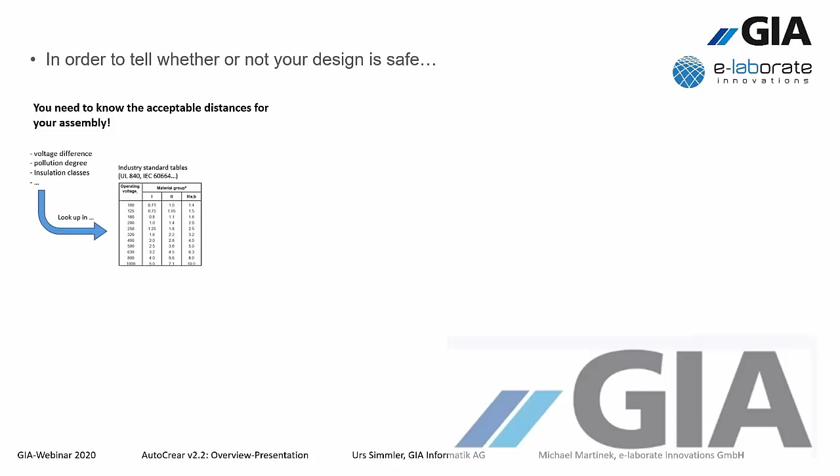These are all known parameters from you, and there are industry standards who publish tables. At some point they have found out that for a certain voltage difference of certain pollution degree, it's safe to have this distance. So somewhere in some table you can look it up, and then you know, for example, that you need like 12 millimeters here between these two networks.

This task can also be tough because there are a lot of industry standards out there for different scenarios, but it's not impossible. The thing which is almost impossible without a tool is the second thing you need.

You need to know the shortest paths in your design, and therefore you need to measure two different distances for each net pair. The clearance, which is the shortest path through the air, and the creepage, which is basically the shortest path on the surface of insulation. The clearance is quite clear, there's not much interpretation about this, but the creepage still has the additional aspect of this groove width parameter x.

This is defined by the industry standards to jump over certain grooves, for example. So the distance x depends on the pollution degree, and if you have a groove which is smaller than x, then the creepage can jump right over it. If it's bigger, then the creepage can at least jump over the corner. So this is a parameter which is very, very complex, especially in 3D.

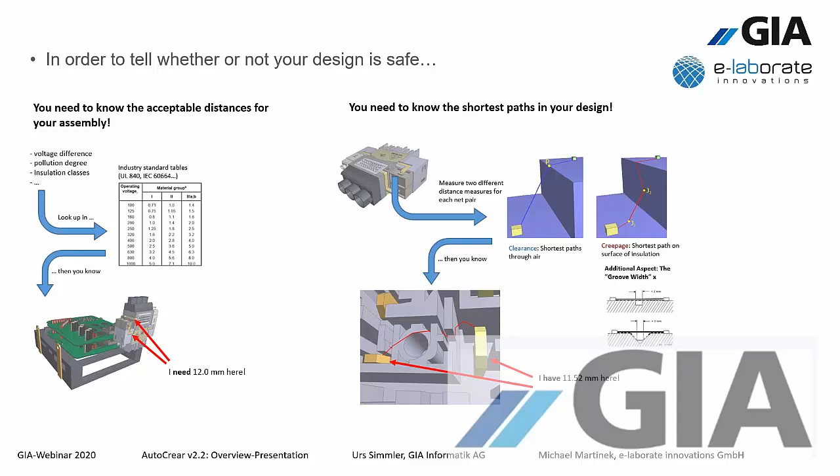As you can see in this result here, you would never even get close to the global minimum path, considering all of the aspects of a creepage path in this case. So your path determined manually will only be rough approximations. You don't have a basis for a decision whether your design is safe. Even if you know how much you need to fulfill, you never know if you really fulfill it in your design. So this is where AutoCrear comes into play.

For the first thing, you have to know the minimum acceptable distances. There's really not much we can do about this. You have to know your parameters, your pollution degree, in which you want to sell or use the assembly. You need to know the standards you have to fulfill. However, there is some help we can assist you with in the program.

In the program you can enter or import these requirements so that the program can also make this decision whether the determined paths are correct or not.

Maybe in the future we can also offer the industry standard tables in the program. This is not possible because this is top secret information from the certification authorities. They want to sell these tables to you, so it's not allowed to publish them in any way. So we are also not allowed to publish them in the software. Maybe in the future when we have more cooperations with the industry standards, which we already have ongoing.

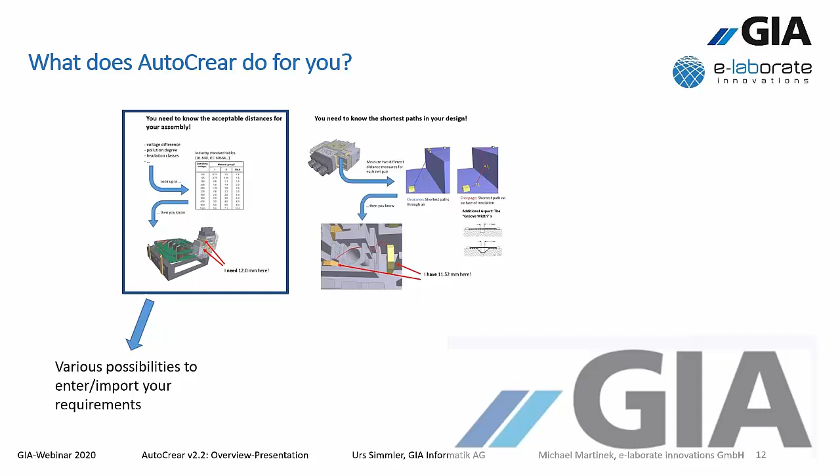But the core feature of the software in its current state is the exact determination of the clearance and creepage paths, the solution of the geometric problems of where exactly the critical paths are, and this is the information you definitely need in your product design. The software does more than that.

This computation engine is of course the core feature, but we have built a complete software solution which includes all the steps you need to perform in order to make this analysis, starting from the raw data you have in your CAD system or in your ECAD system, your PCBs. You don't need to do any preparation of this data outside of the program. Any step you need to eventually get to a documented analysis result can be performed within the software, including the import of the data and combining data from the two different worlds, mechanical and electronical, with minimum effort.

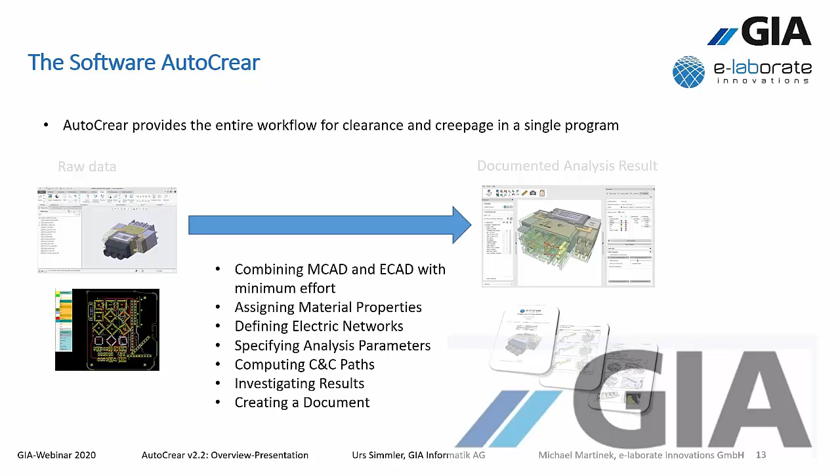Every step which is possible to make automatic is done automatic in the software. So with minimum effort you can get a documented result regarding clearance and creepage. We also implemented this in a very nice workflow which is very intuitive and easy to handle and easy to understand. This workflow I would like to present to you now live in the software.

So I already imported mechanical data. This is possible here with import assembly. Let me redo this step actually. We can import any kind of native data from one of the common systems, like SolidWorks, NX, Creo, CATIA, or you can also import step data, a common format for exchange. But it's always the safest way to make a native import.

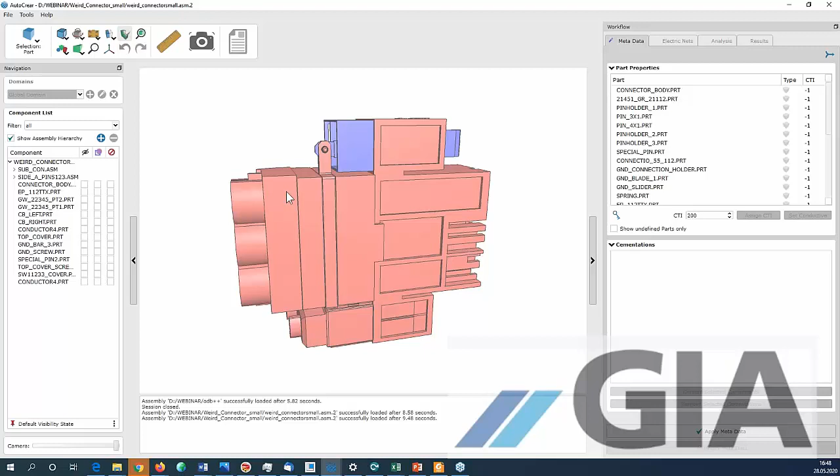In this case, I have a Creo model of our demo assembly. Maybe you have already seen this assembly in one of our demonstration videos. It's our standard model we use for demonstration. It doesn't have any useful application. It's just a very simple connector, kind of a connector we modeled just for demonstration.

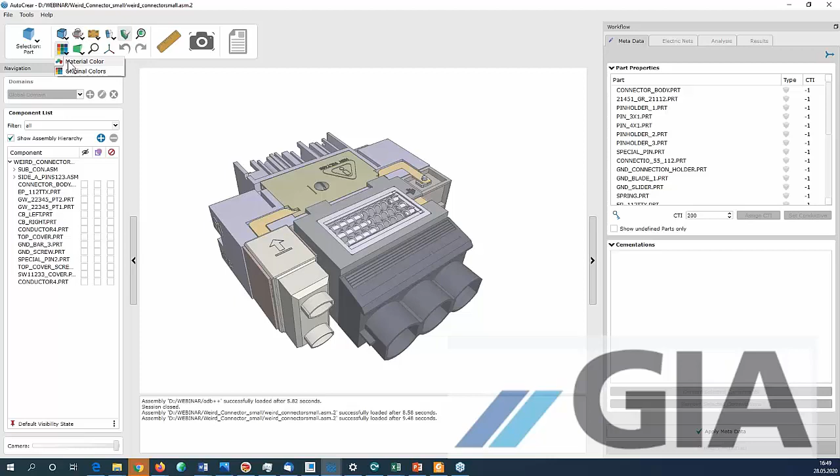And along with the geometry, we can also import the original colors, as you can see here. But it's very convenient, especially for the first steps in the algorithm, to see the material parameters, because this is the first step we need to perform in the workflow. Let me make a little more space for the 3D viewer. So the entire workflow happens here in this area. You will be guided through the entire process step by step.

And the first step is the assigning of meta information, especially material information, which tells whether a part is insulating or conductive. This is done by the CTI value, the comparative tracking index. A value of 0 indicates conductive material, while a value bigger than 0 means insulation — the bigger the value, the better the insulation. There are a total of 4 different insulation classes, and AutoCrear needs to know this value for further steps, and you can do this very efficiently in the program.

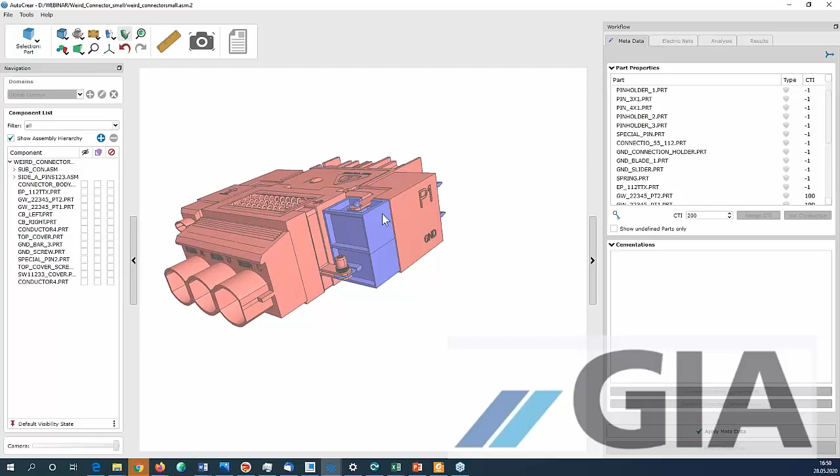Well, if you have such a value somewhere in your data, it's no problem — we can also import them automatically. As you can see here, this is a different color because it already has a material defined in the data, and we automatically imported this. But this is rarely the case that anyone has CTI values already specified in the data.

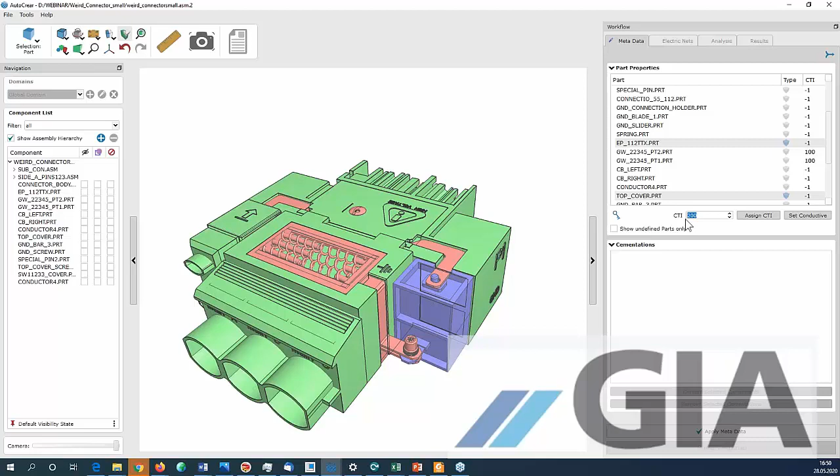But in the program we can do this very, very quickly. I can easily select components here and tell the program to assign the selection a CTI of, let's say, 200. The changed color indicates the material — blue means insulation — and if I tell the program that these 2 elements are conductive, setting them conductive, they become silver.

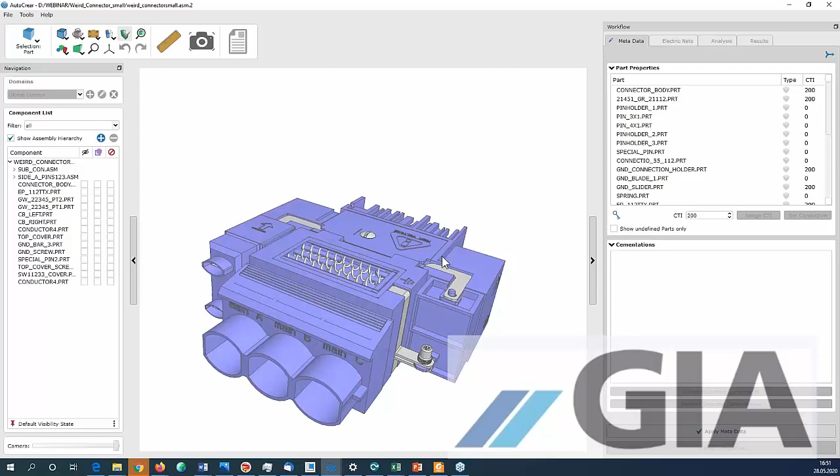It's also very convenient to activate this checkbox here. It automatically hides everything which is already assigned. So these elements are also insulating. This is insulating. Now all the rest is conductive. I can select this immediately at once by drawing a rectangle, set it conductive, and I'm already done with the material assignment, at least on a part level.

There are also certain elements like this, for example — let's concentrate on these 2 by just showing them. This might be a customer part which is not fully modeled, it's just the hull of it, only the interface, and this is one solid body, but it's not one homogeneous material, of course. These pins and this part in the back here need to be conductive actually.

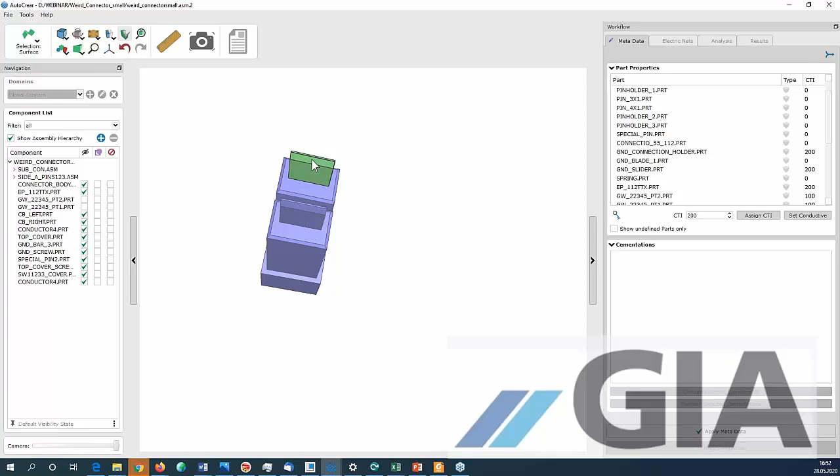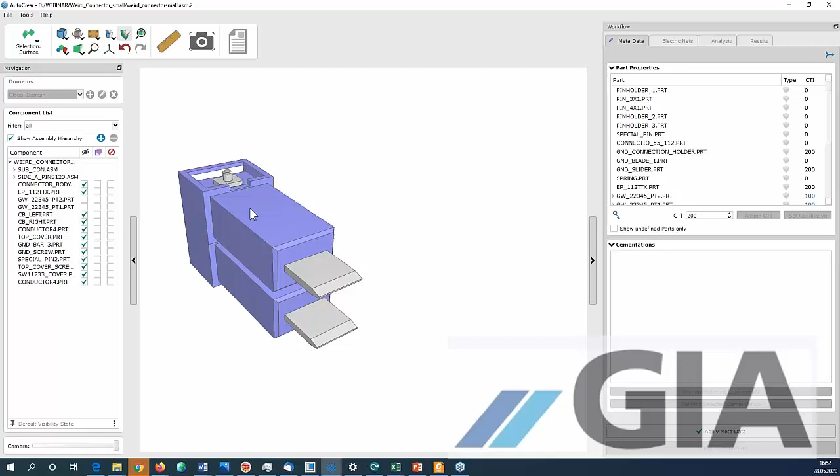It's no problem. We can switch to surface selection, select surfaces. We can also expand a surface selection to a convex region, which in most cases is exactly the effect you want to achieve. So I only have to select one representative surface of each of these extrusions. Then I expand the convex region, and I've now selected everything of them, can set them to conductive, and I'm already done with the specification of these inhomogeneous parts which often occur in mechanical data.

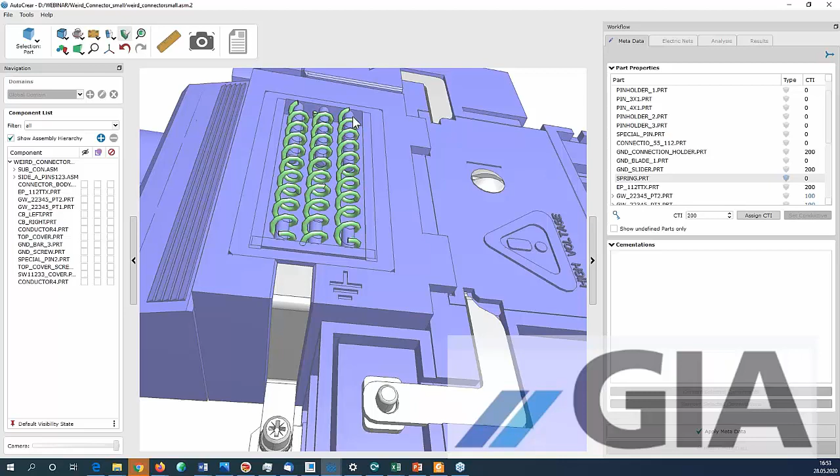So now we are actually finished with the material assignment. We can do more here in this first step. We can also tell the program a surface type, which is very helpful to eliminate certain geometric degrees of freedom. For example, this spring here is modeled in a certain position, but it can be arbitrarily rotated around its axis in the real data. So performing the analysis only on this position can be dangerous because you might miss the worst case.

What would be better is to replace this spring with our geometric representation, representing all possible positions. And this we can do automatically. You just have to tell the program that this is a spring by setting the corresponding type, spring. And the same you can do for screws, which also have some rotational degrees of freedom, by setting this to screw.

This has yet no effect, but in the next step there will be a processing of these assemblies.

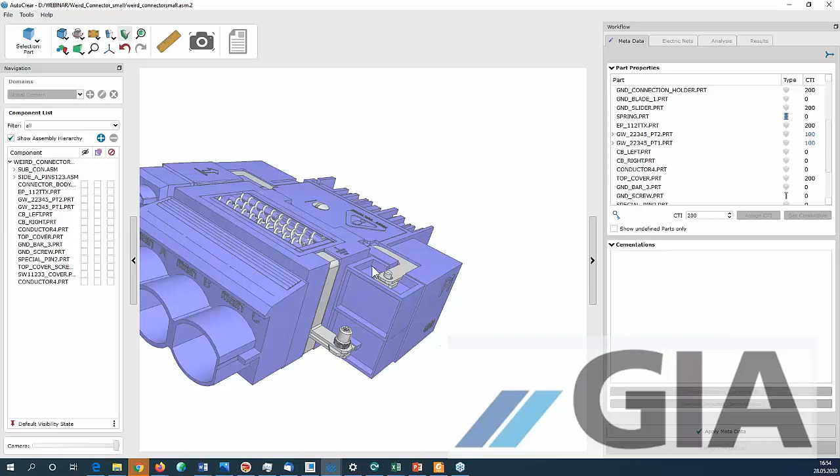But what if we also want to add further geometry to this scene? For example, I also want to add a PCB. No problem, as long as we are in the first step we can add more assemblies, or we can import PCBs directly by adding a PCB.

As you can see, this is still in the beta phase, not for long. This summer we plan to release it, but it already has great functionality and is ready for you to test and give us feedback on what else you need for this PCB import.

The format we need for this PCB import is ODB++. This is a common exchange format for ECAD data. It's basically the same as STEP for the MCAD world. So every common ECAD system is able to export ODB++.

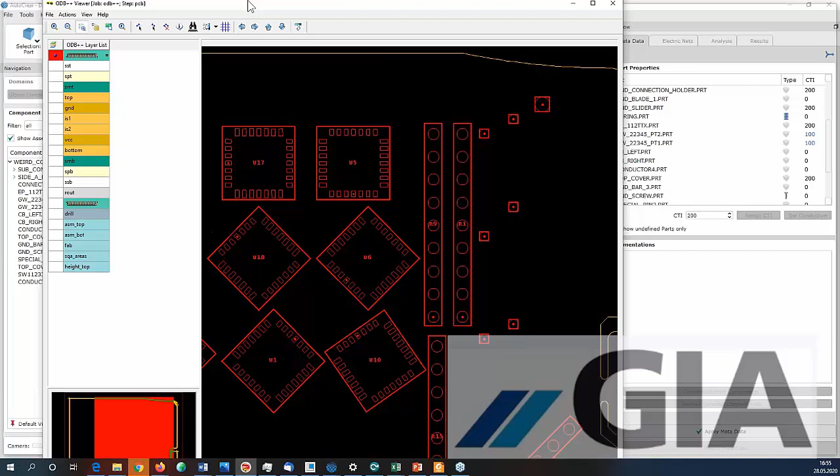And this data kind of looks like this. This is not AutoCrear, this is a simple ODB++ viewer. If you're familiar with ECAD data, this might ring a bell. The ECAD data is organized layer by layer. It's two-dimensional data. Here, for example, this is the top layer of the signal, the second layer, and so on.

And this information we automatically can transform to a 3D model.

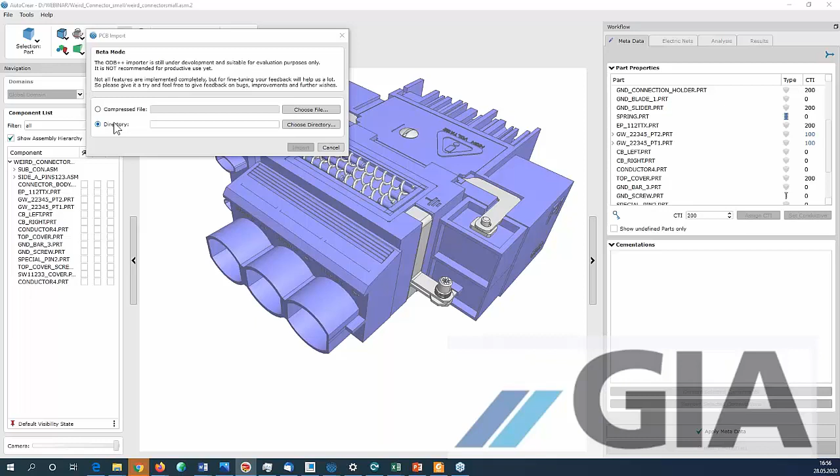ODB++ files are either stored as a compressed file or as a directory. In this case, I have an ODB++ file of a demo PCB. I select this, I import this, and then you will get an import mask, which should also look kind of familiar if you came from the ECAD world.

Here you have all your layers between the signal layers. There is a dielectric layer with a certain thickness. From the ODB++ data we know the total thickness, and we distribute it uniformly among all the layers. If you want to change them, you can do this.

You can also select which of the layers you want to import and consider in your analysis. You could also import the solder mask, solder paste, or components on the top and on the bottom. The drills you probably want to consider.

And about the components, they actually are 3D data, which is not in the ODB++ data. This is mechanical information, but you can establish a database in AutoCrear with these components, and if you have done so, you can select a detailed representation of these components, and we will automatically find the corresponding package name in the PCB with the element in your database.

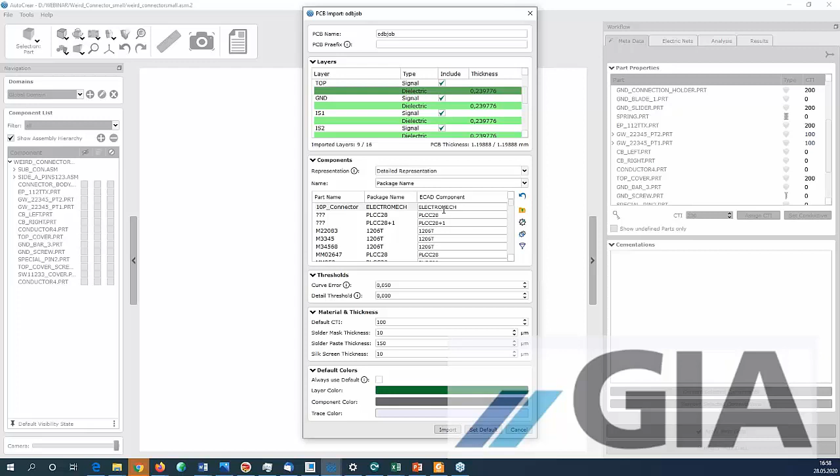And if I import this now, then we very quickly generate a 3D model out of it, and we place the 3D elements from the component database on the correct positions on the PCB.

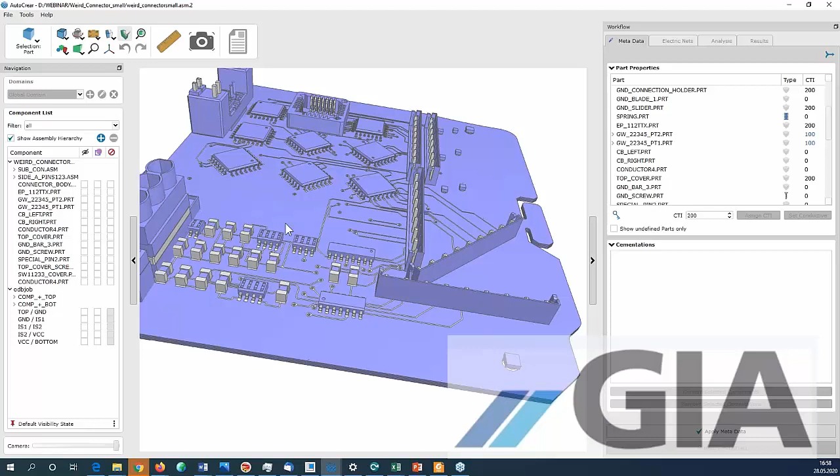And the original colors from the PCB are imported, but as you can see in the material colors, you don't have to specify anything on your PCB. Everything already has a material assigned, and you can quickly go on with the next step.

But first of all, you can see that the two assemblies we imported, the PCB and the mechanical part, are not in the correct position yet. That's usually the case because these two data sets come from different worlds, and in order to combine them correctly, we also need some realignment here. It's no problem.

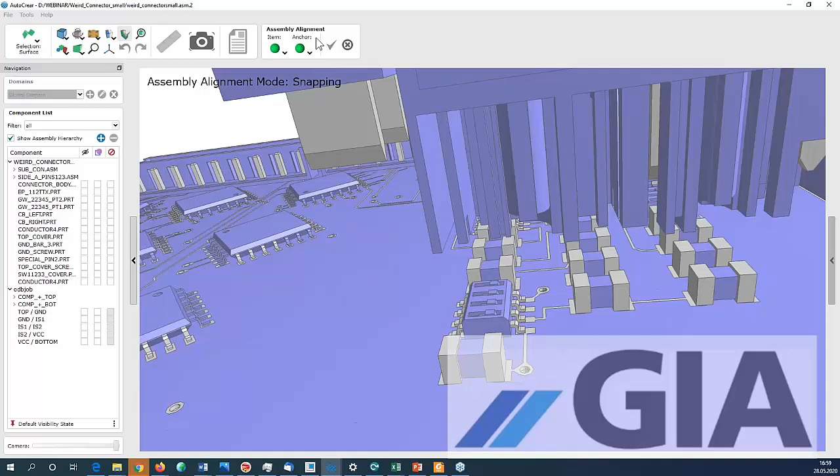We can select an assembly and change the positioning, either by just moving them around or with simple snapping operations. For example, we know that this point here should match with this point here on our component of the PCB, and then it is snapped to the correct position. There are very simple methods here to realign your two different data sets from the two different worlds, your ECAD and your MCAD data.

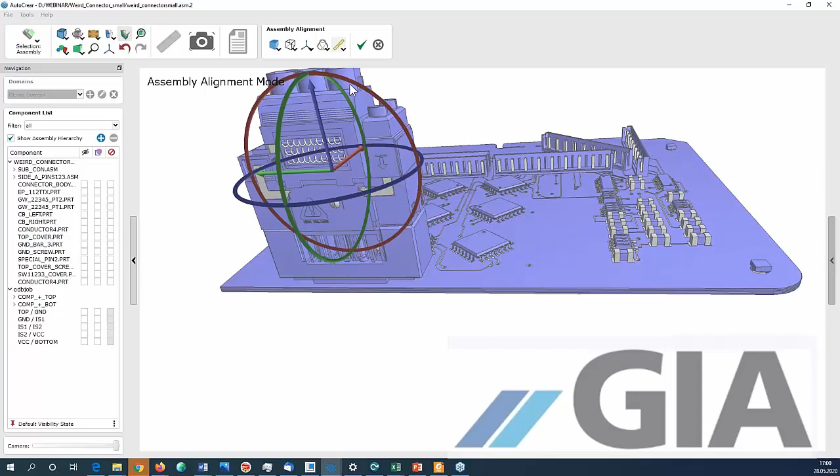You can add as many PCBs or mechanical parts as you like. You can, for example, add an additional frame here, which should already be on a nice position. And only for this we need to define additional material properties - this is insulating, this is conductive.

For now I'm happy with the import, so let's analyze this entire assembly for clearance and creepage.

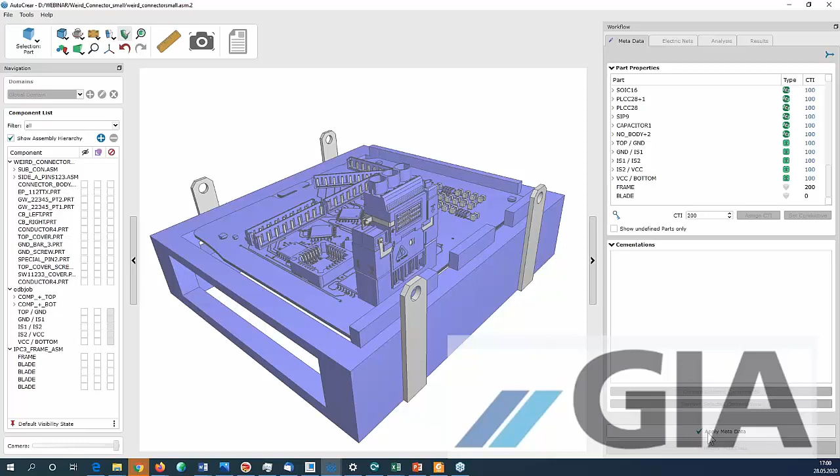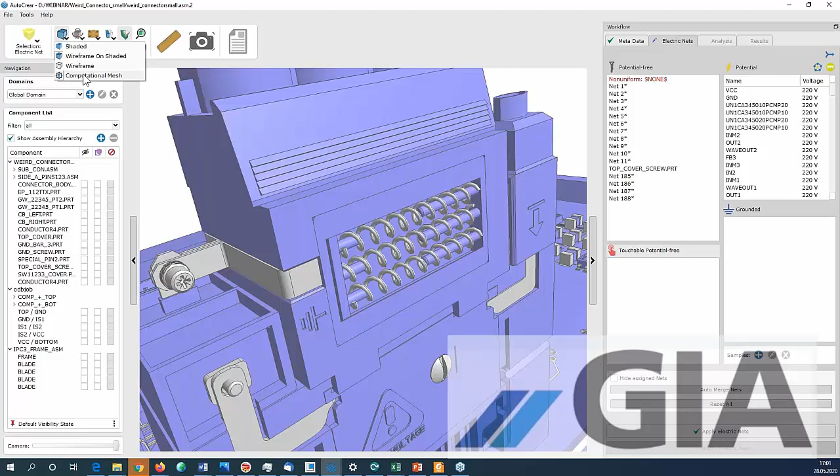So we now go on, we apply the meta information. The program does some pre-processing in the background. First of all, the special part types we assigned have now been processed, and we can look at them in the so-called computational mesh or special display mode, which displays the geometry we eventually use for the analysis.

Here you can see what became of the spring and the screw. It's the geometric representation which covers all the possible rotations, so this is very safe for the analysis - you get the worst case results. It's a function we will also extend for further types, further kinds of tolerances and so on.

Another thing which was pre-processed in this step - note that the pen now moved on to the next tab of our workflow. We are now in the electric net tab, where we need to define electric nets. We have 4 different containers for the nets, which represent the net type: potential free.

That's self-explanatory because it's just electric parts which are not supplied with any electricity, but the most important type, of course, is the type of potential.

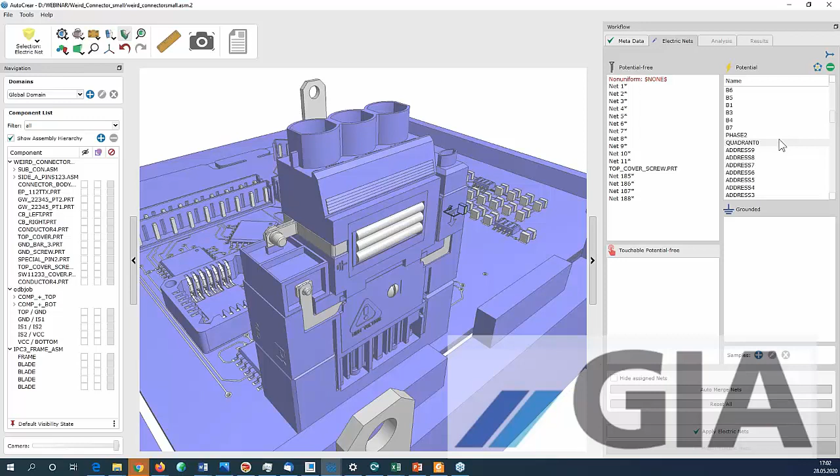So these are the original networks from your ECAD system. And also note that the pins of these components are automatically matched to the correct net on the PCB and are combined with the net.

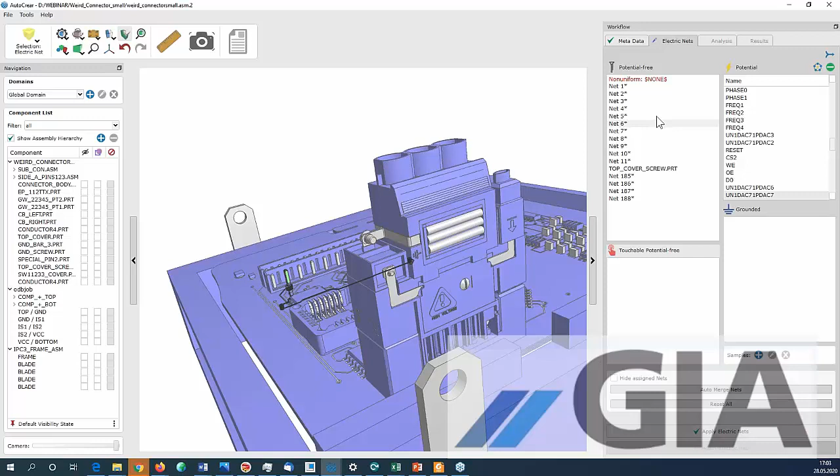In the mechanical world, there's of course no electric information in the data, so we just placed them in the potential free list for now, but this you can now manually change.

Let's concentrate on this connector only. Let's also switch back to the original geometry.

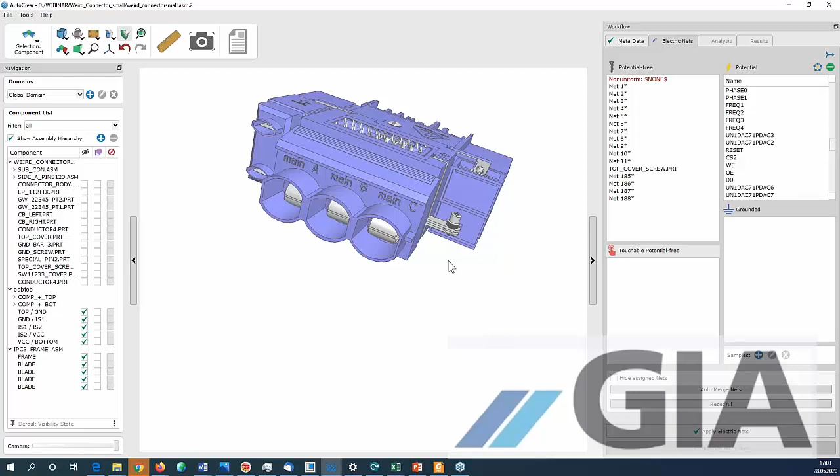We don't know the names of your nets, but we could make some pre-processing - I can switch here the selection filter to net, then I can select the networks directly from the graphics. They are also highlighted here in this list.

You see that the nets - let's change the visibility, let's hide all the insulators so we can concentrate on... this is not what I wanted, but let's just go with this view here.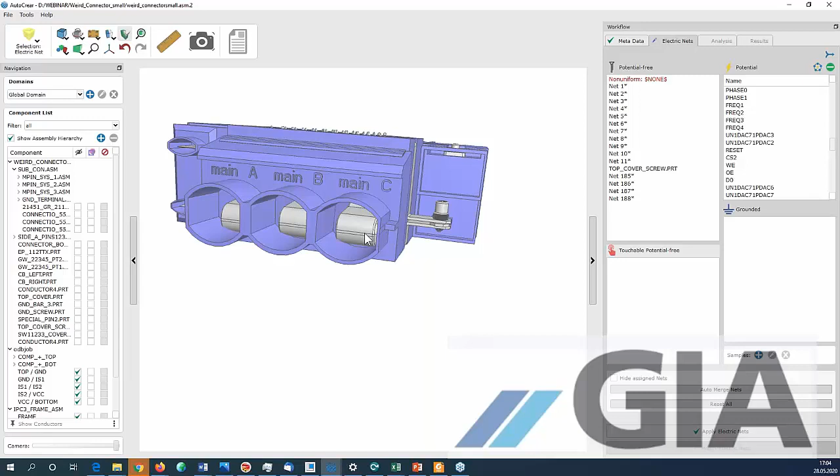So each net is, or networks are, predefined by means of their geometry. That means that every conductive element, so every element with CTI 0, which is touching or intersecting other conductive elements, is automatically combined into a net.

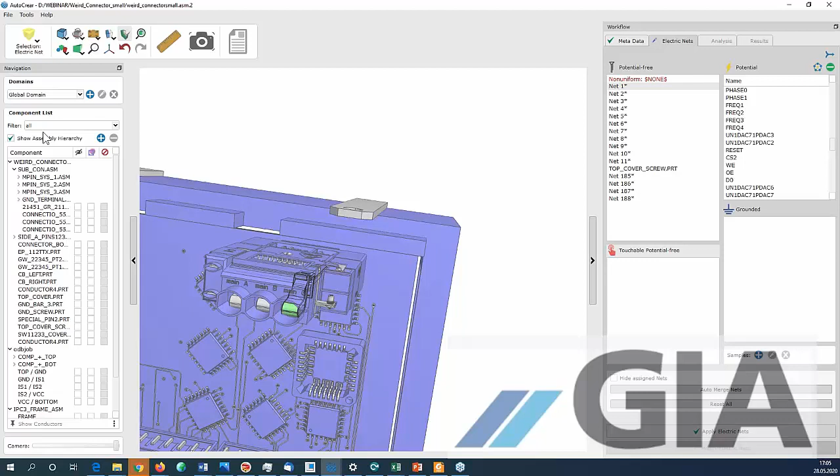So this is already a predefined net consisting of 4 components, and this was done for the entire assembly. So, we want to concentrate on this.

Now you just have to go through them and give them a name. I mean, they are here in this - let's again switch to electric net. They are written here on the side, but there's still something to do with the nets.

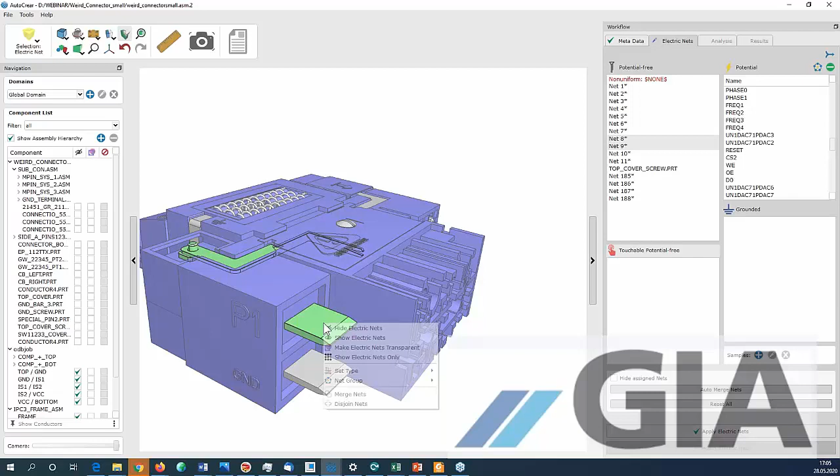For example, this one and this one here, they actually should belong together because they are connected through the interior of this part, which is not modeled. But it's no problem - we can just select them both, join them together or merge them together, and now they belong to one and the same net.

The same we can do here with this net. And now we can also give them a name - so this is P1, and let's say this is net ground.

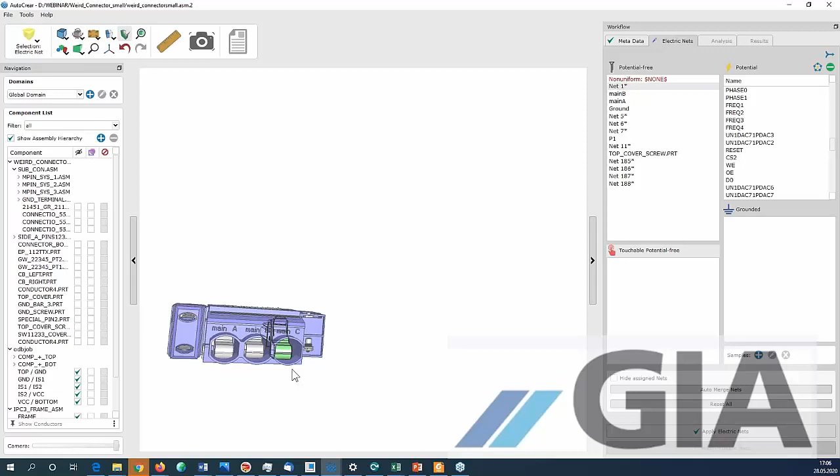Here we have 3 networks, main A - oh, this is not correct. Here we have main B, and this one is main C.

And what else have we here? This one is R1.

And now I also want these nets here to be supplied with electric potential, so I just move them over to this list of potential carrying nets.

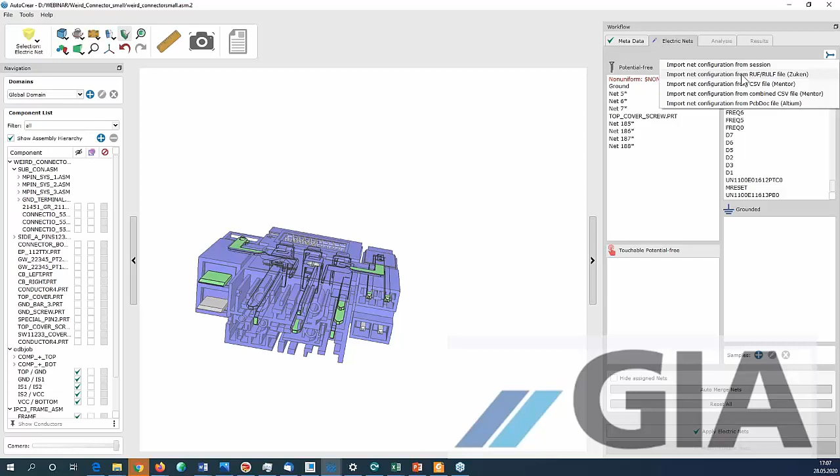There are very many nets here because on the PCB there are a lot of nets, thousands of nets for a big PCB, and this is actually not what you need for the analysis because the requirements are defined on only a handful of net groups. The net group is usually already defined in the ECAD system and will be directly exported to the ODB++ file, which is not the case for our PCB, but we can also import the net information for each net with certain files we support from main vendors like Altium, Zuken, or Mentor. In this case, we have a RUF file from Zuken, and in this file the net groups are listed, and we automatically group together the corresponding nets. So we only have 4 groups here on this PCB which need to fulfill distances to each other.

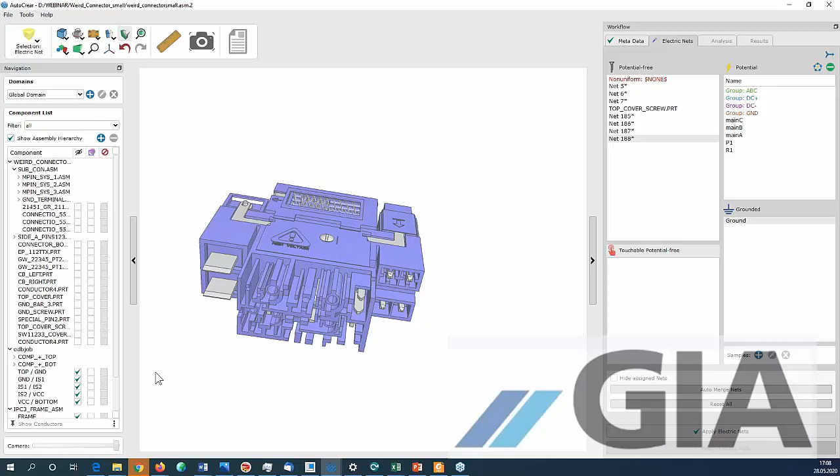And here we have our mechanical nets as well. Then we have our grounded net, and let's move this to this list of grounded nets. Here, what we have here, the three springs which are potential free, so we remain them in this list. And I guess these 4 remaining nets are the nets of our outer frame here. Yeah, these are these 4 here. We can also combine them to a single net. Let's call this our HV net, and also move it over to the potential list.

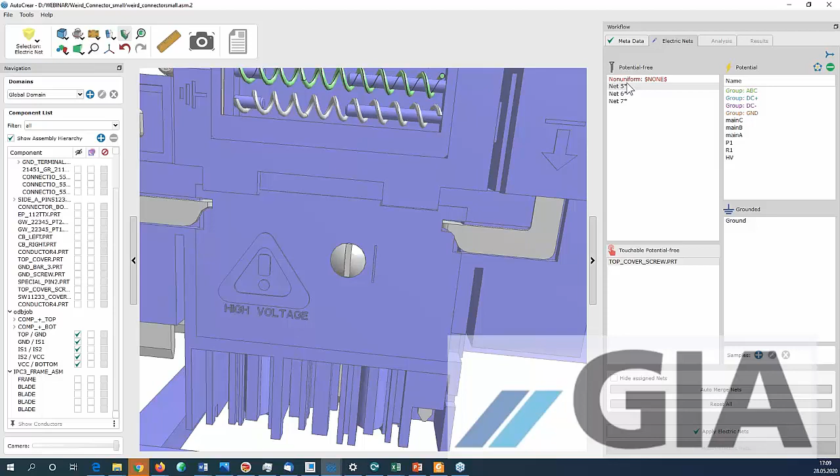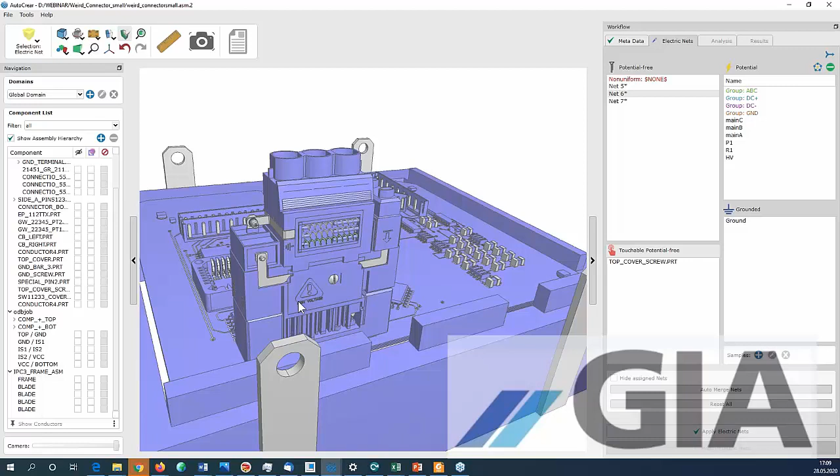So we are finished with the network assignment, and it's very convenient, as you see, that all the networks on the PCB are already imported. This would be a really tough task to reassign them again, but you don't have to. We only have to deal with the mechanics here. And now we can go on with the next step.

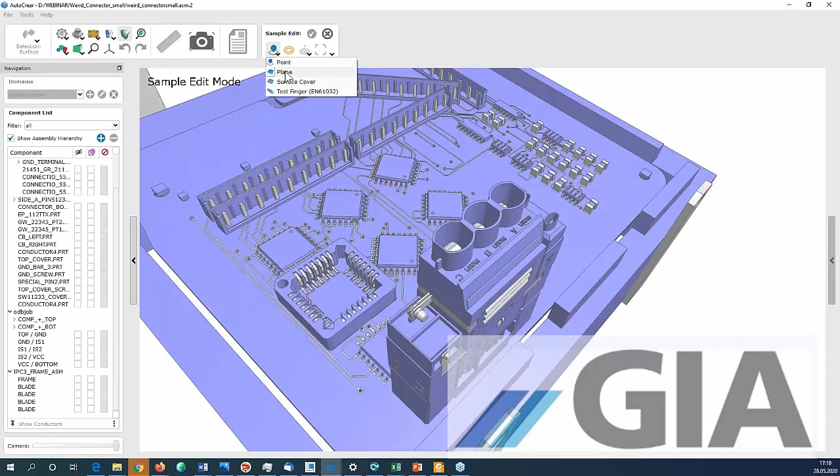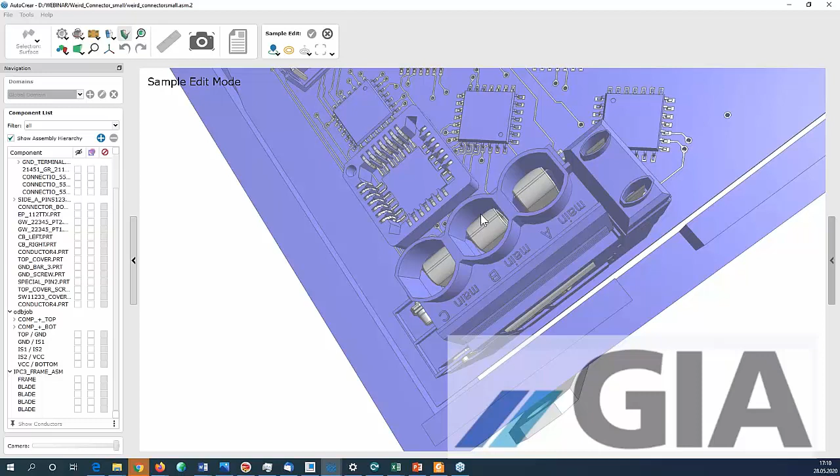Well, maybe it's also worth mentioning that you can also add additional geometry which is only required for the analysis. For example, some industry standards tell you to fulfill certain distances to virtual planes, virtual surfaces. For example, some cover which would cover these 3 holes, an imaginary metal placed over this geometry which you need to fulfill some distances to the corresponding nets inside the hole. It's no problem. You can also add, for example, a surface cover here, and this will simply appear as a network in your list.

You can also add a norm finger, for example, or other planes. Very convenient, because it would be not very nice if you would have to model these planes in your CAD data only for the analysis, because you would have to delete them afterwards again. So this is nice that you can keep these kinds of additional stuff you only need for the analysis inside the program.

So now we are done with electric nets already, and now we can proceed with the next and the 3rd step of the workflow, which is assigning your parameters concerning the analysis.

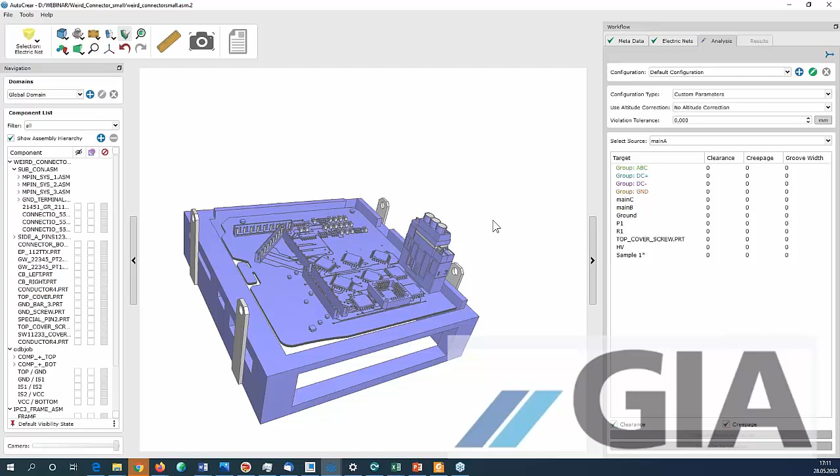Basically, we need a matrix here. For each pair of nets, we need to know the distance you need to fulfill for clearance and for creepage. You can toggle through this matrix, so you can select a source net here, and you can select any net of type potential. And after that, you get every net. So it's also, let's hide the sample, it's also highlighted here. And after you select a source, you get all the possible target nets in this list according to this source. And here you have the corresponding value for clearance, creepage, and groove width, which you can directly assign. For example, I need 5 millimeter clearance, 6 millimeter creepage, and 1 millimeter groove width parameter, this X, which denotes the jump distance for the creepage.

Yeah, and you could do this for all net pairs manually, or there are more options to fill this matrix. Maybe you already have some kind of a distance matrix which looks like this, for example, where clearance and creepage path are already designed. Okay, there's always the same value. Oh, there's a 7, not a 5. But if you have such matrices which have the exact namings of the networks in your assembly, then you can also import it here.

It will be automatically assigned to the corresponding pair of nets. In case of your PCB elements, there are already such files which come from the ECAD systems. For Zuken, for example, it's the MTX files. For Mentor, it's special CSV files, and we can also parse them.

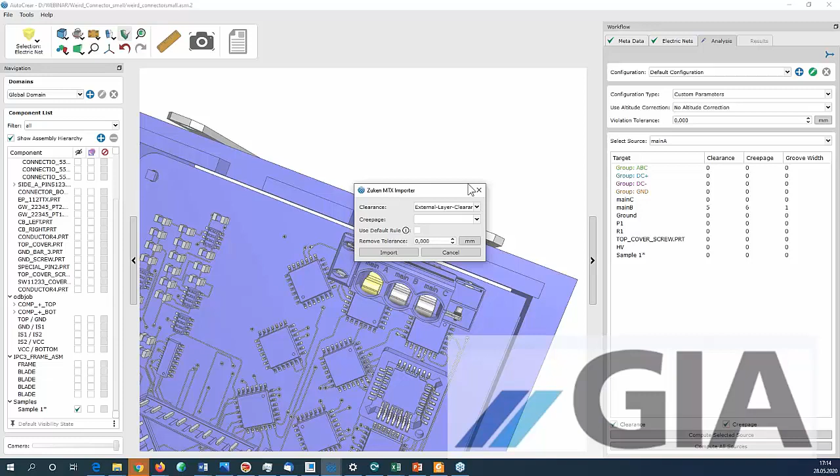And then we can extract the information about external and internal rules from these spacing tables and assign them either to the clearance or the creepage. This is for now basically a workaround, because AutoCrear was designed for pure mechanical analysis, where it is sufficient to have one value for clearance, one for creepage, and one for groove width. But now when we want to support electronical data, we need to distinguish between internal and external rules.

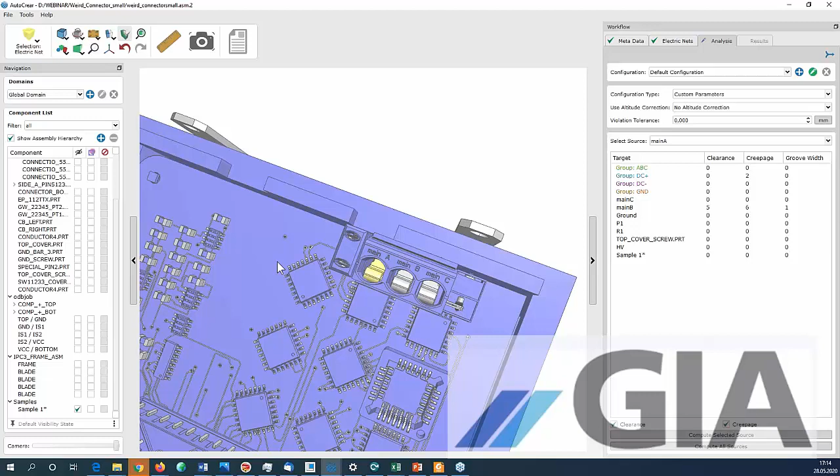This will be part of version 3.0 coming in summer, but in this beta version of this ECAD import, we can already do some analysis on the PCB, but only with one value. So you can say, I need, let's say, 2 millimeters between this certain net pair in order to test your assemblies for clearance and creepage. So this entire tab here will be under major revision. We will see some screenshots of this afterwards.

Concerning the mechanical data, the most convenient way to fill this matrix is probably through standard tables. Standard tables map a certain voltage difference to a distance value. And for creepage, they also consider the insulation class. So for each insulation class, we have different values, also depending on voltage difference.

These are the standard tables which are published by the UL, for example, or the IEC, where eventually your values to be which you need to fulfill are located, and you can input these tables in AutoCrear. That's only a one-time process, and after that you have them available here. Also, you can consider altitude corrections.

And certainly we would have to make more information. We would have to specify voltages for each potential carrying nets, which is also possible, but not within the scope of this short demonstration here.

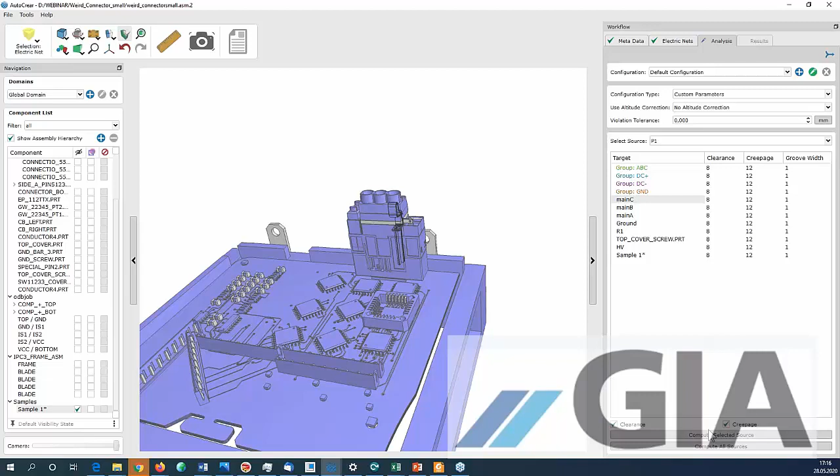In this demonstration, we can also just use a simple value for clearance, creepage, and groove width, assign this to all of the net pairs, and then we can perform a computation. But this will take approximately 10 or 12 minutes. So in order to speed this up, I have prepared this in another session here.

What's still to say about this tab here is that you can also add a tolerance. So you're probably not only interested in the values you need to fulfill, which you should type in here in this matrix, but you might also be interested in paths which are slightly above this value, and you can add this by adding a tolerance to this path. So then you will not only get the creepage values within 12 millimeters, but 13 millimeters.

So I've prepared something here where individual values are located, and also added a tolerance of 1. And after computation, which, as I said, for such an assembly would take 10 or 12 minutes, you get this kind of result. So you can also select your sources here.

There's already an indication here in the source. The red one means there is at least one violation, so at least one path which is below the respective value you specified here, outgoing from this source. And if you select the source, you'll get details here. There is a list of all possible targets. And then you see the details in these 2 columns. CL stands for clearance, CR for creepage.

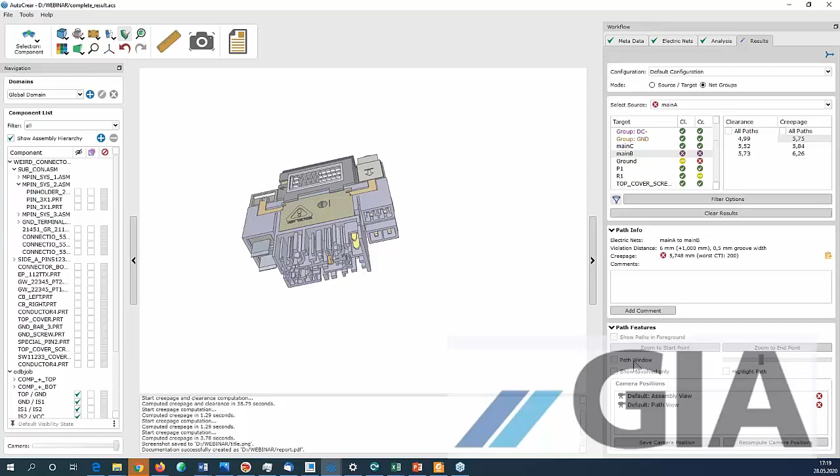For example, this path window, if I activate this, we cut a hole in the assembly so that you can see through the occluding components, and you can quickly identify the path.

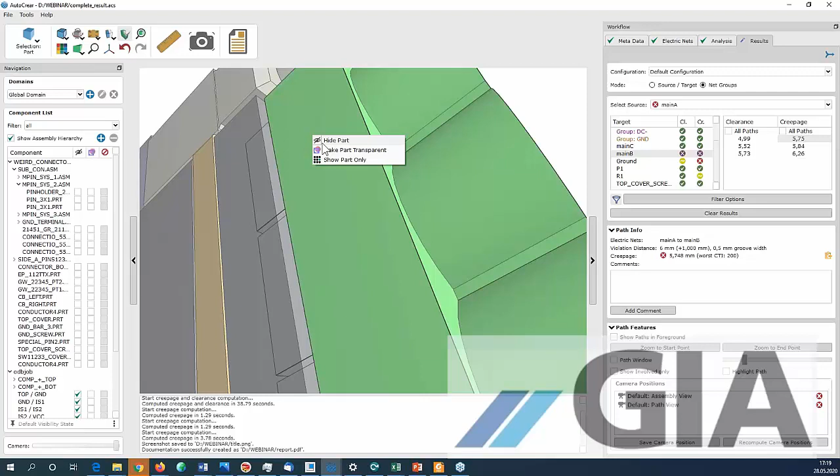And then you can optimize the view. Like, for example, we need to hide this one. Okay, now we see the path very clear.

We can also save this camera position for the path when we want to revisit the path again later. So here we can save this camera position. Now it's saved. If I change it, I can also restore this. I can comment on each path.

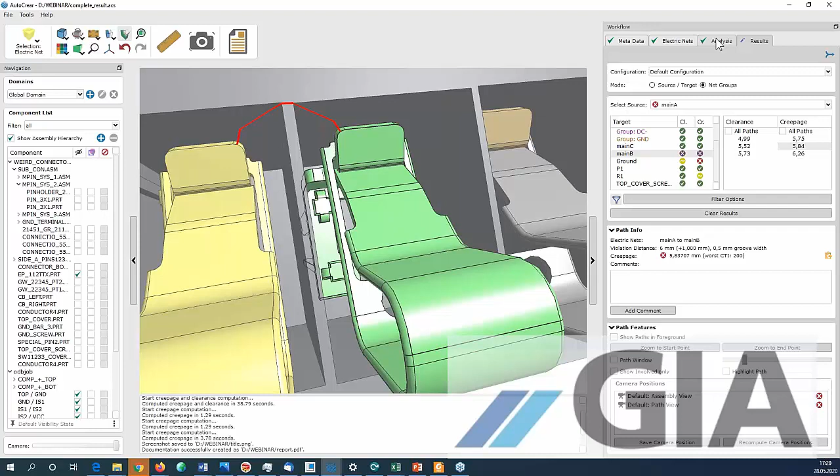I can make tags, because this is now the point where you want to investigate your results. So the program already made a decision for you whether the path you found here is a safety violation or not, because you already also defined your distances you need to fulfill. But maybe for certain scenarios, this path is not a violation, so you can override this decision, tagging the path as okay.

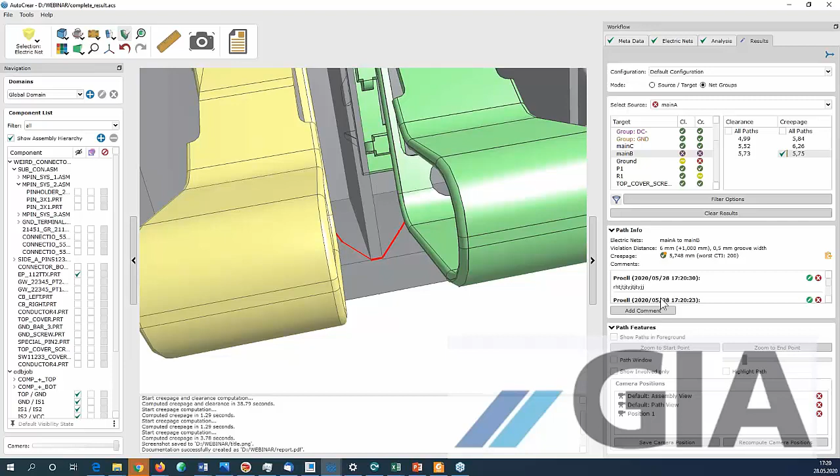And then you can also add comments to this path, telling you why you think this path is okay. So every path here has its own log, where every tag, every comment is logged with a username. And so this is our Mr. Proell, our developer of the interface from AutoCrear. He tagged the path as okay, and also the date is noted here.

So you can see this path here. You can say, okay, yeah, now that's a clear violation, so you confirm this as a violation. And there's another path in the back here. I'm not sure what to think about this path, so I'm marking this with a question mark. So these are the tags you can place on a path to see for yourself which paths you've already visited manually. You can also comment on them.

And after that you could save the session. At any time of the workflow you can save the session and give it to another guy, who can then open the session and see your comments and your tags, and then he can change them. Well, let's for example fake this with a new user.

Basically this comes from the Windows login, but we can also change it manually. So now I got the session from my colleague, Mr. Proell, and I see, okay, what did he do? He tagged this path as okay. No, that's not correct, I'm of a totally different opinion. This is clearly a violation. I add my comment here, and this whole conversation is also logged for the path and stored in the session. That's a very nice feature here to discuss about the results.

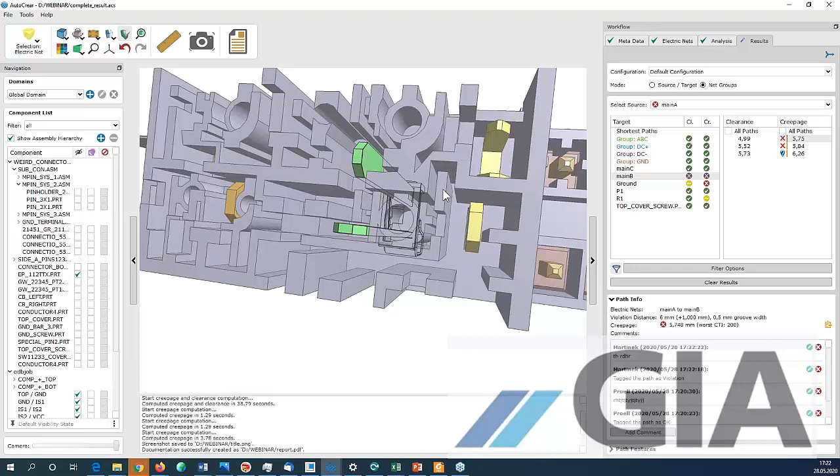We see some further results here. This, for example, is an example where the shortest path is traveling through a conductive or a potential-free element. The same should be here, and this is the case where we take a shortcut through this spring here, from this into this net.

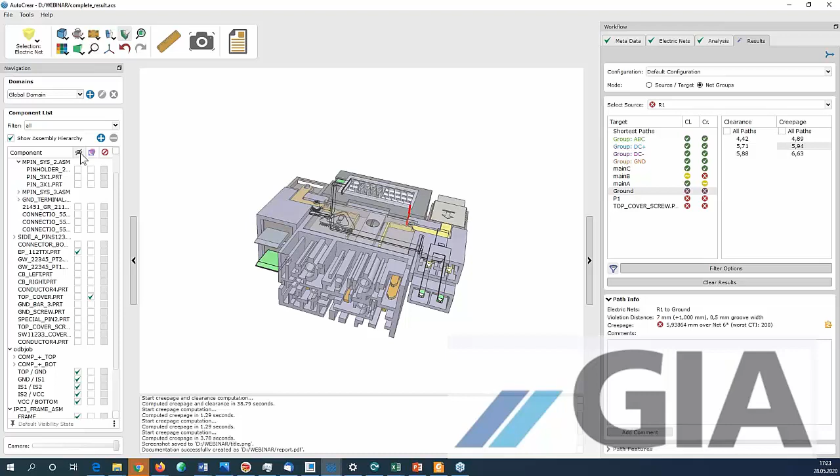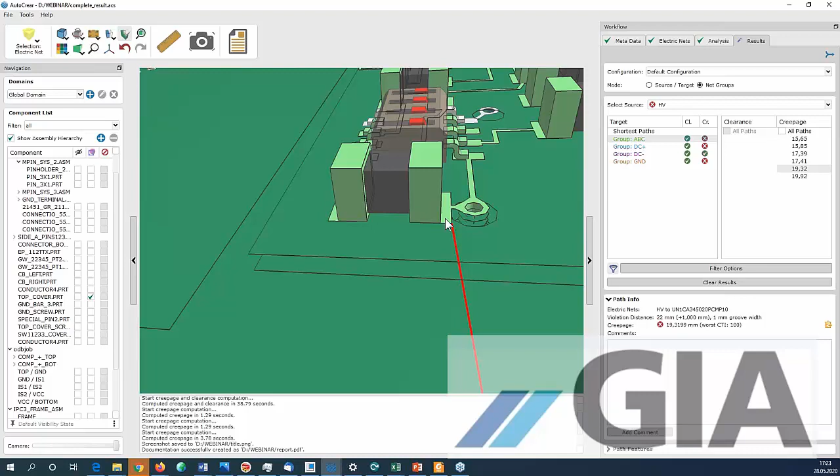We don't only have all the paths within our mechanical part here, we made an entire analysis of our entire scene. So we also have paths from our mechanics to the networks on the PCB. For example, here we have a path to the PCB from this. We also have the path within the PCB, and even in full 3D, which is very convenient because this cannot be done by any other tools.

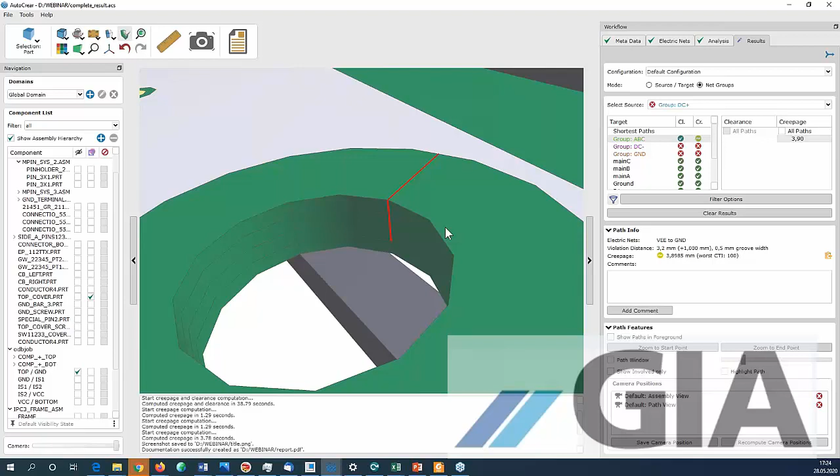So let's see which path I have here. This, for example, should be one path. Yeah, it's located here. So you see that we can also compute paths within the PCB which go over different layers. This path leaves this net here, it goes through the hole, and then it enters another net here on the back. So we can make a full three-dimensional analysis of the entire scene with one tool.

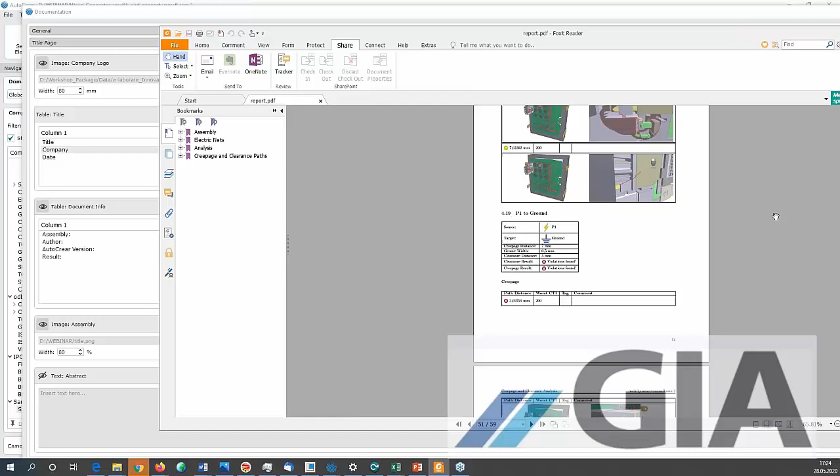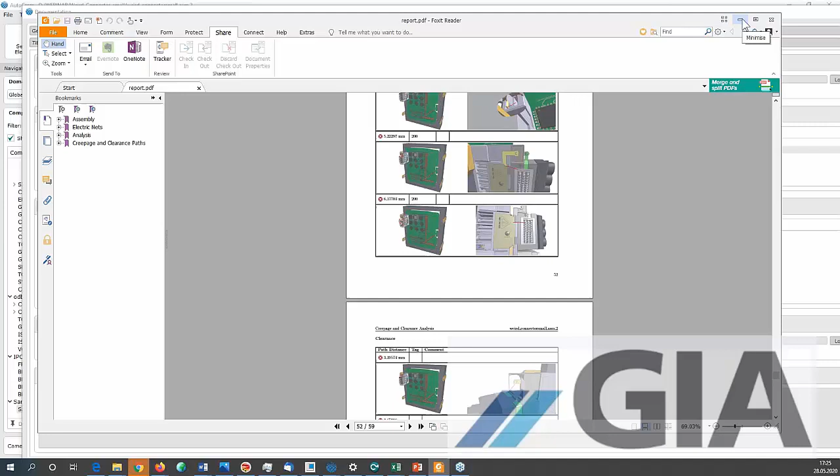And after we have investigated all the results, we want to have a documentation of it. There's a nice tool where you can customize your report, and then automatically generate a report like this, which is also very well structured. So we have a nice title page, we can also include your company logo, we have a nice table of contents here, and in the end you also get the paths documented for each pair of nets. That is basically exactly what you need, either for yourself or also for the certification guys who want to see your critical clearance and creepage paths.

And yeah, this is the big advantage of the software, that you can do this entire workflow here, and you can be sure that you don't miss any safety violations because you get the exact paths for clearance and creepage for each pair of nets.

Instead of typing a single value for clearance and creepage for each pair of nets, you assign the rules to the networks. And in an ECAD rule, there's the additional consideration whether the path is interior or exterior, and we look at the correct value from the ECAD rule. You can combine, for example, standard table values and your custom values for certain net pairs.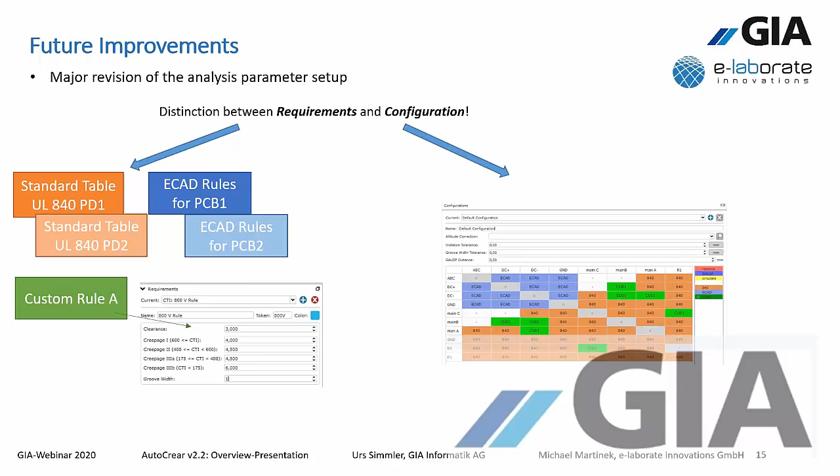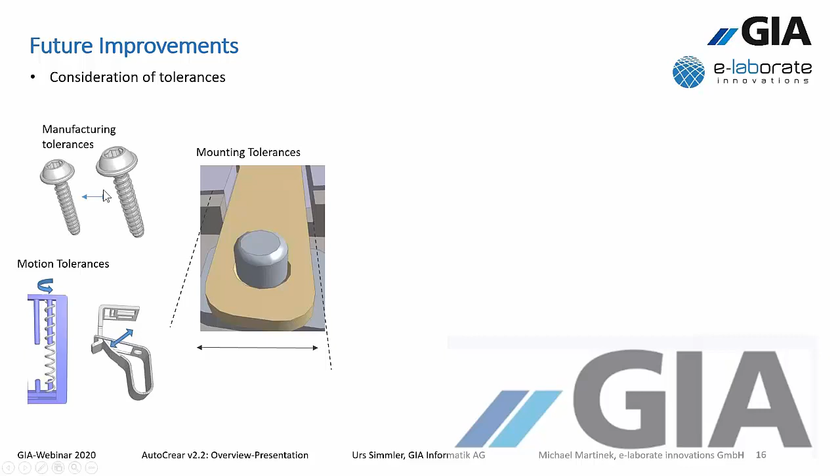So this will be a massive improvement in the next version. We will also, but not in the next version, in one of the following versions in the next years, make considerations about tolerances—not only motion tolerances but also manufacturing tolerances, which may vary in size, or mounting tolerances. The idea is basically the same as we did for these springs, that we change the geometry according to the worst case, the worst possible path which can happen due to tolerances. This is also a very important topic dealing with clearance and creepage, and something we will address in the future. At the moment we have this consideration at least for elements such as springs or screws.

Another big improvement will be made with the creepage, considering different CTI values. It's not always the best solution to determine the minimum distance or the path with minimum distance, because this might not be the worst case path. In this case, we have a good CTI value, a good insulation, this gray one here, where we require 5 millimeters, and we have 6 millimeters on it, so we would say it's okay. But actually, we can also create a safety violation here by not considering the shortest path, but the path with minimum resistance. This is something we discuss at the moment with UL, the guys who make the rules and industry standards.

The first expression from them was, yeah, that's a very good idea. They don't know if they would accept it in the final assembly, but it's very good. The program will provide this scenario so that a human being can watch over it and tell you if it's correct. So the physics about this still have to be researched from UL's side, but this is something we will definitely implement in AutoCrear, so that you always get the worst case under the different scenarios. In this case, we would tell you that's a fail, because we can make a percentage of compliance according to the values you need to fulfill. This is something that will also be in AutoCrear in the future.

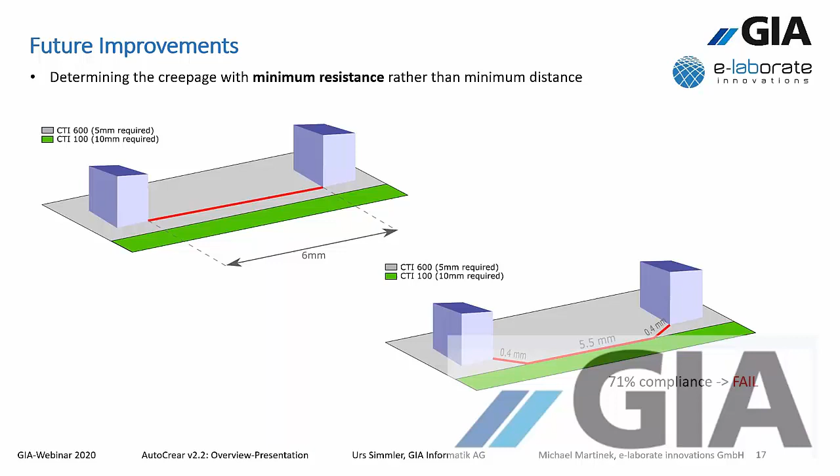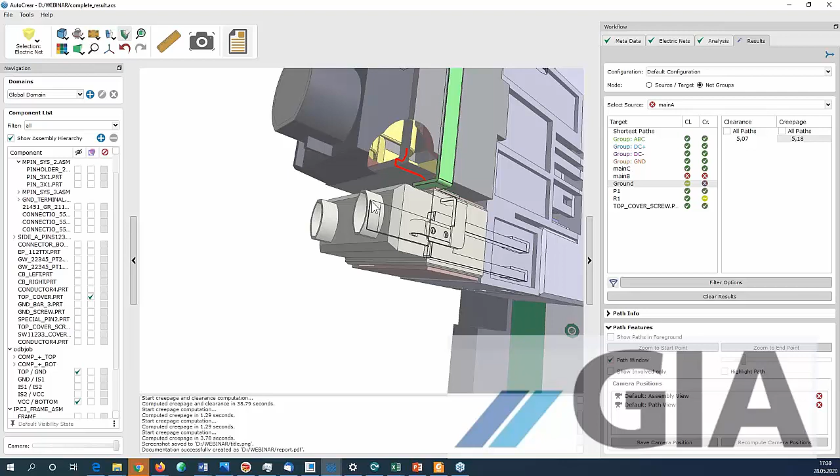As you've seen in this presentation already, AutoCrear is now a tool which can do you very good in your designs. You not only can detect all the violations in your design and see where they are, you can make target-oriented corrections in your assembly to eliminate these clearance and creepage violations, and it also helps you a lot to make your assembly more compact, because you not only see violations, but you can also see where you can maybe save more space in your assembly, since you have a lot of additional space available beyond the requirement. You can make your assembly more compact.

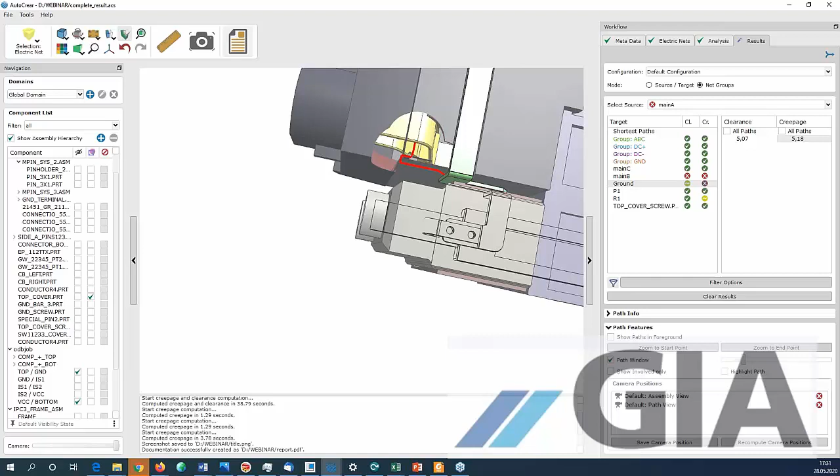Thanks a lot so far, Michael. It was very, very interesting. Some questions came in. One question was, how long did it take to create the report you showed us? I think it was a PDF with about 60 slides.

How long did it take, about? I think 1 or 2 minutes. So this was the standard design we have seen here, which is already in the program. If you want to customize it, you would need to take some time, but this is also a one-time process, so you can customize your report, or you can also use the standard layout. So if I click here on Generate Document.

Wait, you're not on. I'm showing my screen right now, I guess. Oh, that's no problem, I'm only showing the documentation tool. I'll make you a presenter again. Sorry. So I don't know if because this is a documentation tool now you can see your screen. Yeah, we can also customize the contents of it, but you can also leave it with a default layout.

If I generate the report here, I just define the name of the PDF, and then it will take approximately 1 or 2 minutes, depending on the image quality, because we do a lot of screenshots. The higher the image quality, the longer it will take to make the renderings, but even in the worst case, you will wait maybe 5 minutes for huge assemblies with big image quality. So this is not actually a factor to consider in your process.

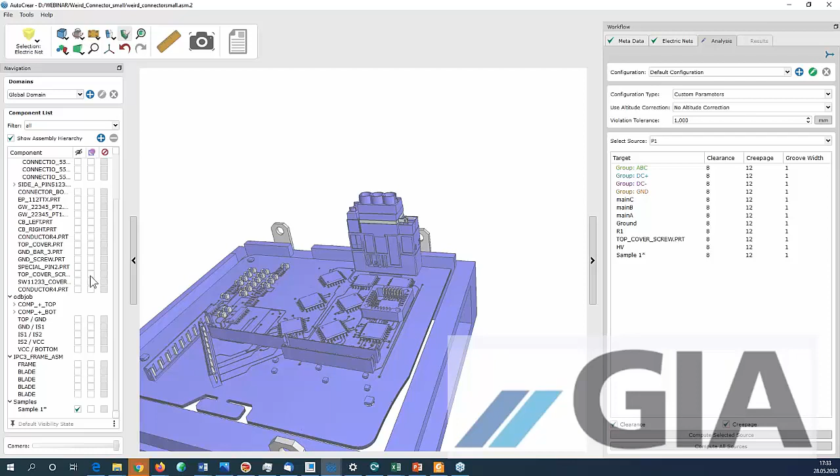The entire process of this analysis - we have seen live the metadata, the electric nets, the analysis parameters - can also be done very quickly with the matrices. The computation itself takes 10 to 15 seconds, and then the documentation generation also 1 or 2 minutes. Just imagine how long it would take for you to make a manual determination of path and manual documentation. So this will save you a lot of time.

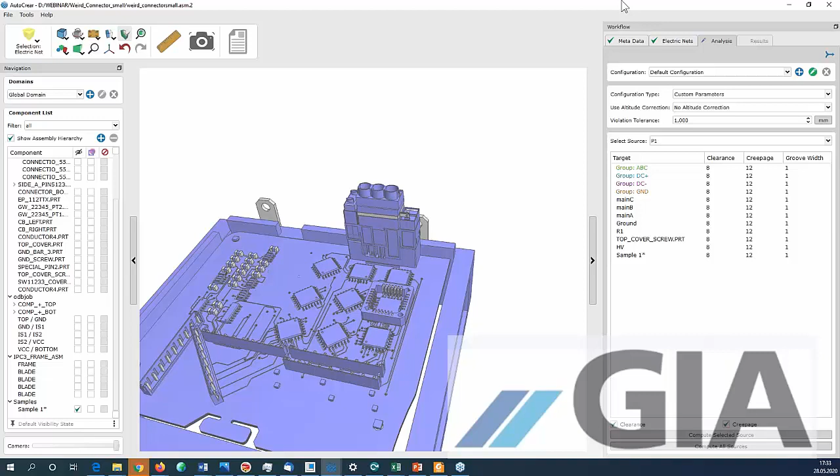Thanks a lot for the information. Other questions coming in about importing components from CATIA. Can we also import material information from CATIA? I think it's about the CTI values, or whether it is conductive or not. It doesn't matter from which system you import, so CATIA is also considered.

We can also import additional metadata from the user parameters you defined in CATIA. You just have to tell the program in the options what is the name of the parameter you use for CTI. This is also future work - we can think of a material database in AutoCrear where we can map a material name to a CTI value, because it's not always intuitive to know the CTI values of your materials, but you surely know the material itself, the name of the material you use for your design. So you can establish in the future a database.

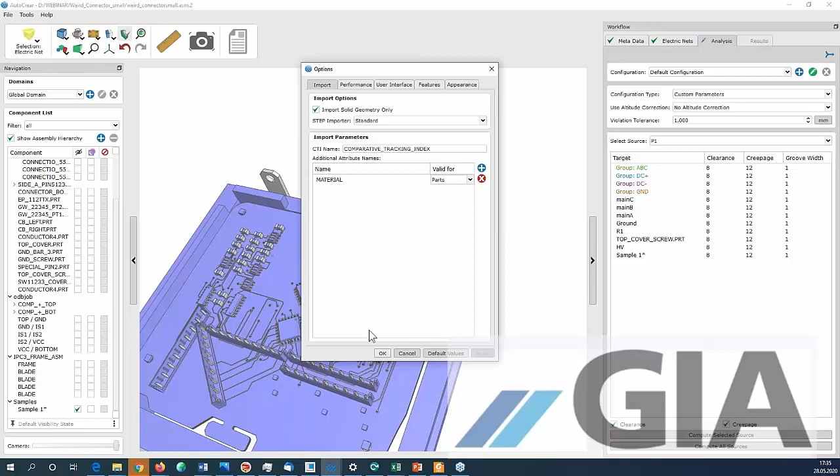for materials which maps the name to a CTI value, and if you have materials in your CATIA data, then you can just tell the name here. You have to do this before you make an import, whether it's valid for parts or assemblies or both. Then we automatically search for this parameter in the import, and if we found a value, we can do something with it. In this case, we can take the material, look it up in the material database, and assign the correct CTI value for this material. Or if you directly have the CTI value in your data, then you can also directly specify the name here.

Anyway, we just scratched the surface of the software here in this short webinar. If you're interested in the software, we are happy to give you an individual demonstration where we take at least 2 hours, covering more than we could cover here in this short presentation.

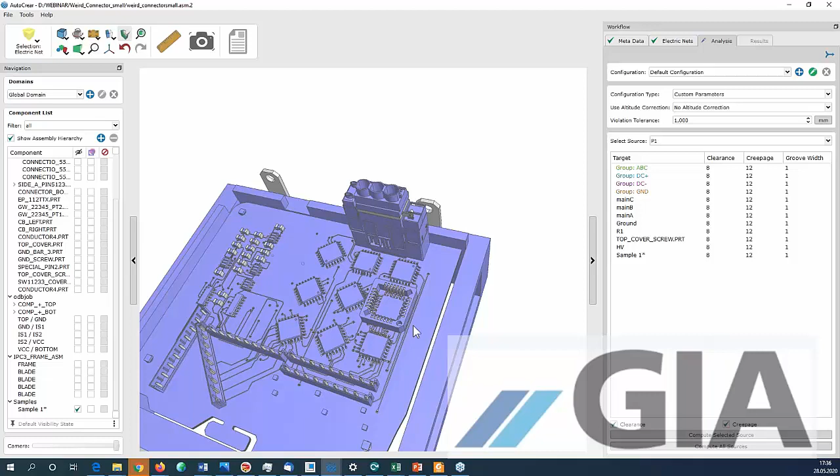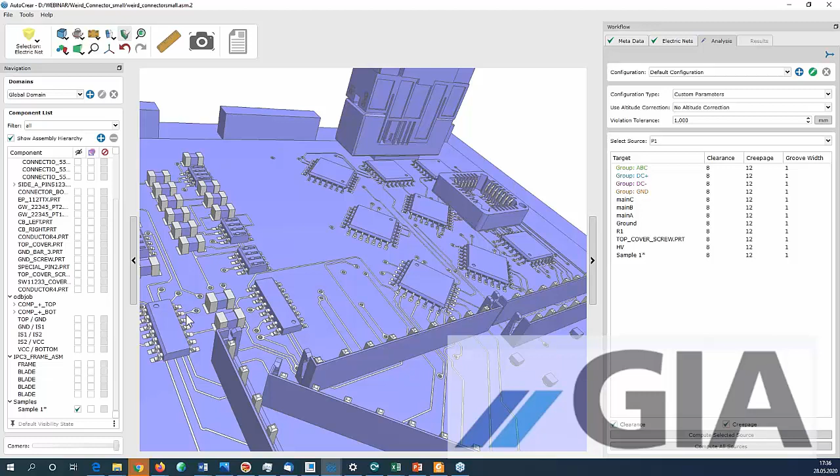What about simulation, the effect of potting or conformal coating? Potting, conformal coating - yeah, I'm familiar with these expressions, but I must say this is the expertise of my ECAD specialist, Mr. Prell, who is in charge of this ECAD interface, which is still under development and will be released in summer, as we said already. So I would refer this question to my colleague. You can send an email, for example, to Urs or me, and then I will give you the contact to the corresponding person in our development team who is in charge of this ECAD tool.